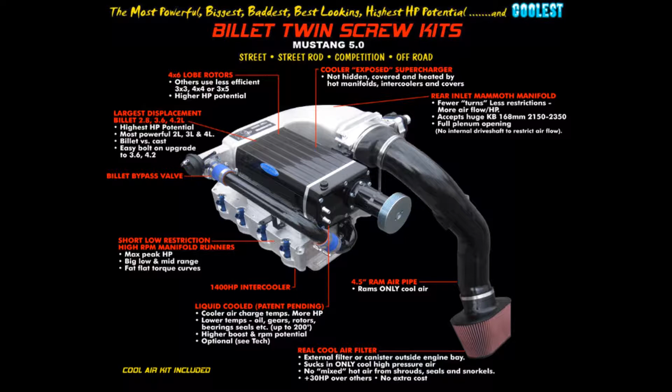Hello and welcome to my Kenne Bell twin screw supercharger installation video. In this video I'm going to be going over my installation of a 2.8 liter liquid cooled Kenne Bell supercharger on my 2012 5-liter Mustang.

Before I started the supercharger installation, I wanted to get some baseline numbers on the car. So I headed over to Smokey's Dyno in North Canton, Ohio, and we strapped the car down to their Superflow dyno. The only modifications done to my car for the baseline runs were a cold air intake, an off-road X-pipe, and a tune. The car put down 434 rear wheel horsepower and 429 foot-pounds of torque.

So when you order the kit from Kenne Bell, this is pretty much what you're going to get. A couple of big 80-pound boxes. Here's the first one opened up. You can see the heat exchanger and some heater hoses there. After you get that stuff out in a big chunk of foam, you can see the supercharger there. And then after I opened up the second box, there's the air filter, the air inlet. And then after I pulled that stuff out in another big chunk of foam, you can see the lower intake manifold upside down there.

And then this bag has pretty much everything else in the kit. The water pump, the throttle body adapter plate, the injectors, all the hardware. Everything else is in this really big bag. Here's a better view of everything that comes in the kit. I have it all laid out on the table here. And at the end there you can see that really big bag of stuff. Trust me, there's a lot of parts in there.

Here's a before shot under the hood of my car. And now I'm pretty much going to start off with step 1 of the instructions. The Kenne Bell instructions are really good. There's a picture for just about every step. The steps are pretty easy to follow. There's no way I could cover them all in a short video like this, but what I'm going to try and do is focus on the ones that I didn't understand too well, or the ones that gave me trouble, and then the other important ones that I think people would want to see.

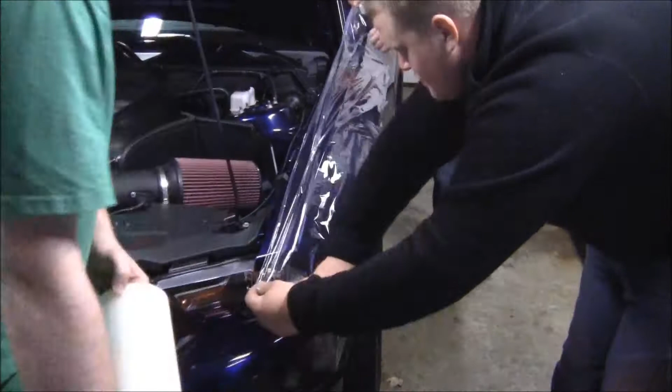Alright, this is step 1, which is pretty much wrapping the fenders of the car and wrapping the front bumper just to make sure that you don't scratch anything while you're doing the install. As is customary with almost any part you install on a car, go ahead and disconnect the negative battery terminal. If you've already installed an air intake before, then the first 20 or so steps are going to look pretty familiar. That's really all you're doing here is removing the engine cover, removing the factory air box, removing the mass airflow meter from the air intake.

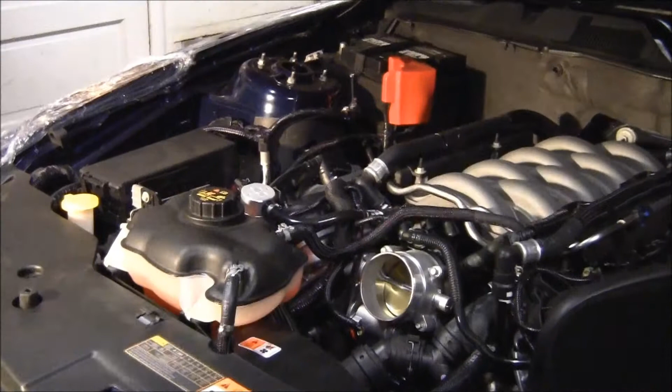Be careful where it talks about the clip for the evap line. That clip is really easy to break. I broke mine. You can't buy the clip by itself from Ford. You have to buy the whole line. It's like $50 some. I ended up using a zip tie later to attach that line. I'll show you how I did that.

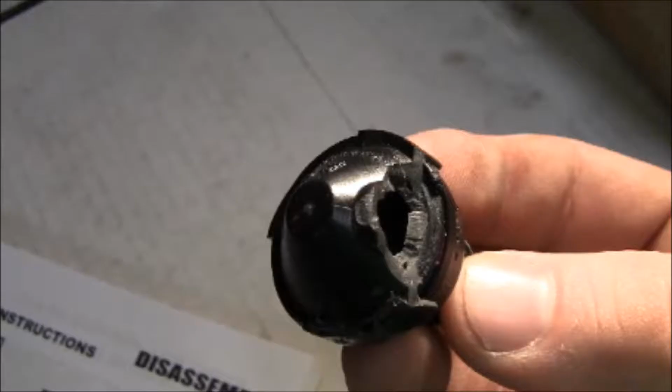Right, that brings us to the first real snag that I had in the installation. This is the result of what happened when I followed step 22 that says pull the power brake check valve out of the brake booster. I pulled and pulled on mine. I tried to be somewhat gentle with it, and I couldn't get it to come out. And then I pulled a little bit harder, and this is what I got. I broke that fitting off where the actual line goes onto it. And I think really what happened here is that my booster was still under vacuum when I was pulling on it. I think if you pump the brake pedal a few times, you'll probably bleed that vacuum out of the booster, and this will probably come out a lot easier.

This is where I was after step 38. You pretty much just take the fuel line off, unplug the throttle body, unbolt the intake manifold, and pull a few clips off the back and pretty much lift it right off.

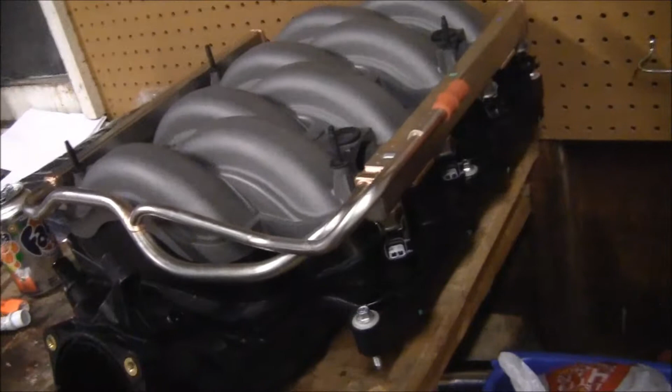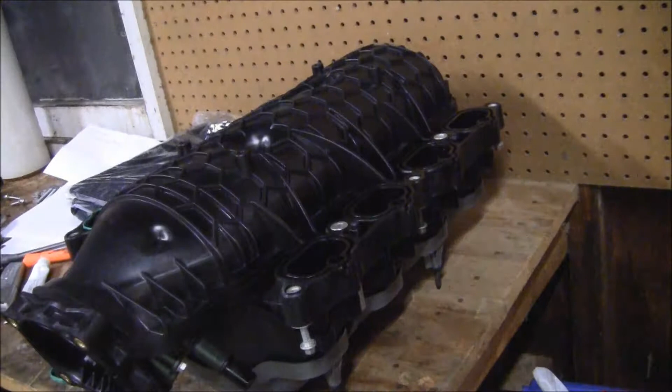The next series of steps have you disassemble the factory intake manifold. The first thing that you're going to do is pull the injectors out while they're still attached to the fuel rail. And then after you get the fuel rail and the injectors out of the way, you can flip the intake manifold over and pull all the gaskets out of the bottom of it. These aren't really too bad to get out. I had to use a small screwdriver to get underneath of them because they're kind of hard to get your hands on, but once you get under them and you can actually grab a hold of them, they all come out pretty easily. I kept all of these in the same order that they were in the manifold to try and put them back on the same spot on the head. I doubt that matters, but that's the way I did it.

Next, you're going to disassemble the fuel rail, and really you just have to pry all of these clips off the injectors. Once you kind of figure out how to get the screwdriver down in there, they come off pretty easily. You just kind of have to slide the screwdriver down past the clips that you can push on the side of the fuel rail, and they come off. One thing to be careful about, the last one of these that I took off, I shot it across the garage, so I guess just be careful when you're pulling these off there that you don't lose one.

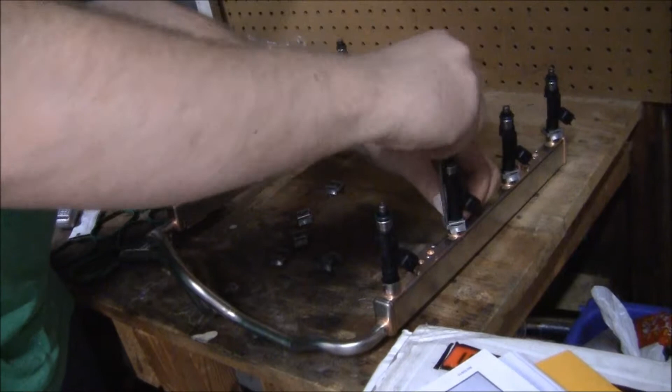Next, you need to lubricate the new injectors with oil. I just use clean motor oil for this. I wipe a little bit around each of the O-rings and they snap down into the fuel rail.

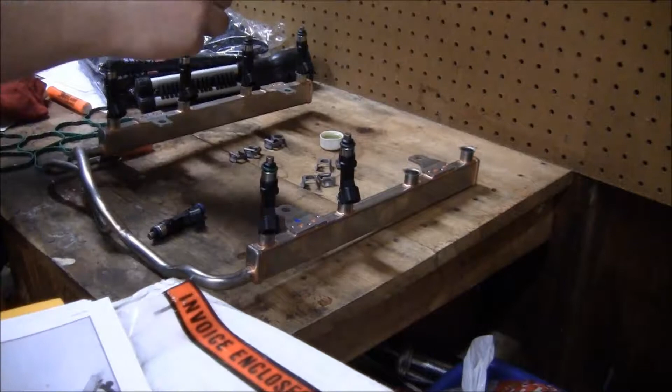Next, you have to put the clips back on the injectors, and this part got a little bit confusing for me. Step 50 says note position of rail stubs. I have no idea what a rail stub is, but I think what they mean is that if you look at the body of the injector, there's a groove cut in it, and there's like a spot where the groove isn't cut, and that gives the clip a place to sit. So if you put the clip on where it kind of wants to go, the plug for the injector will be kind of off at an angle from the side of the fuel rail.

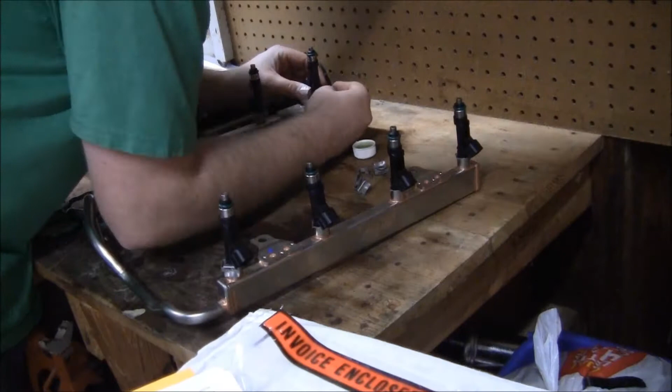And Kenne Bell doesn't want that. They want the plugs for the injectors to sit perpendicular straight out from the fuel rail. So once I kind of figured out what they wanted, you just kind of have to force the clip over that little piece of rubber that's on the side of the injector, and make sure that all the plugs sit perpendicular out from the fuel rail.

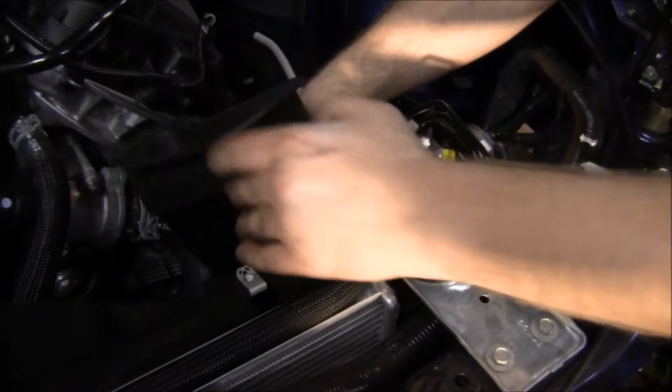After you get the front bumper off, step 63 says using a screwdriver, remove the air horn on the driver's side. What you're looking at here are tabs that hold the air horn pieces together. There's two halves to it. I had to separate the two halves to get it out of the car. I don't see how you could get it out in one piece. There's a couple more tabs down on the inside where the air actually flows through, and if you push on them, you can separate the two pieces. And there I am pulling the back part out of the engine bay, and then this is the front part where those other two tabs are, and I'm removing that from the front.

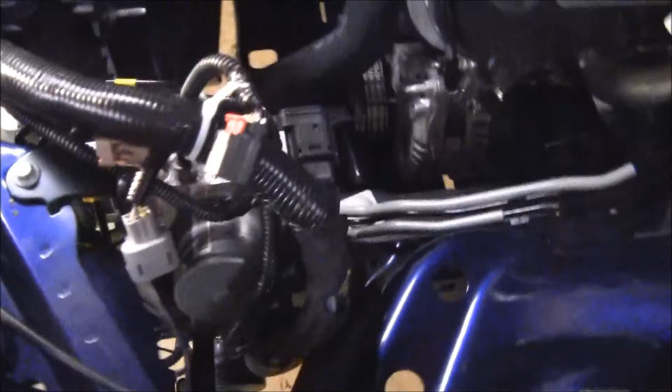After you get the inner fender and the headlight out, you're pretty much ready to cut the hole for the air intake. This is pretty much what it's going to look like when you get to that point. One thing that I would do that they don't tell you to do right now is to remove the horn. There's one bolt that holds it to the car, and it made it a lot easier for me to cut the hole for the air intake if I took that off.

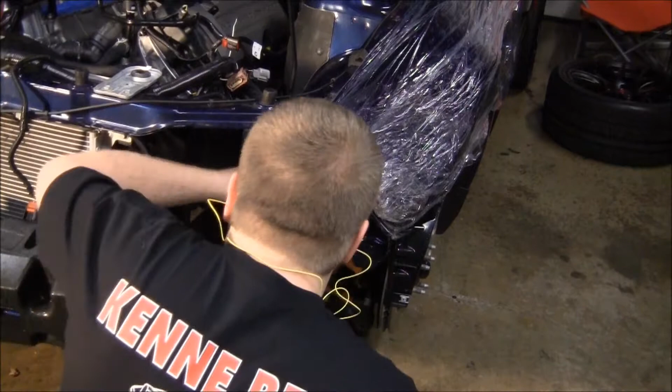Okay, this is the part where you have to cut the hole for the air intake. And to be honest, this part wasn't as bad as it sounded. You know, when I first read the instructions and I read online that I had to cut a big hole in my car, I wasn't really excited about it. I think it's a little bit better than grinding the timing cover like you have to do with some other superchargers, because at least when you do this, you're getting cold air into the intake, so you're at least getting a benefit from it. But it's really not that bad.

You cut the templates out, you trim them, you tape them onto the car, and then you just follow the line. I actually cut this one probably a little bit higher than it needed to be, and later on when I'm mounting the bracket for the headlight, you can see that. Right there is where I was taking the horns off. Like I said, that cheap jigsaw that I bought, it was easier to maneuver in there after I took those off. And I just bought a couple of spare blades for that thing, and it pretty much cut right through it with no problem.

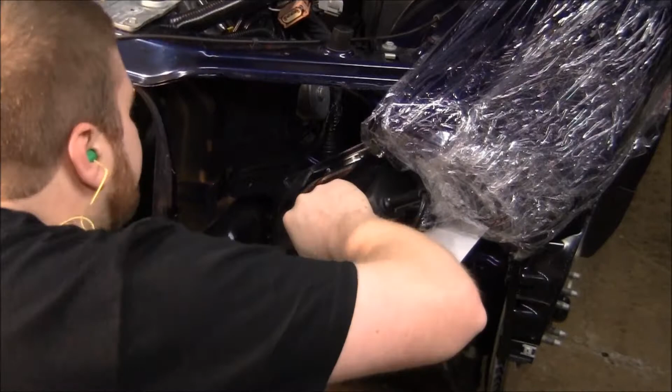Honestly, cutting the part on the inside was actually easier than this, which I thought the inside part was going to be harder. But you pretty much just cut around that half circle shape there, and it'll still kind of be connected in the back. But you pretty much just need to cut through that front piece with the template.

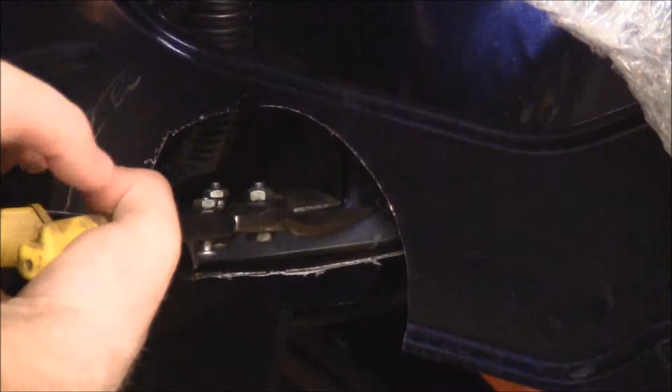This is pretty much what it looks like when you're done cutting in the front. Like I said, it's still attached in the back, but really all I did was just sort of push down on that front piece, and there was like that little part you can see back there with the hole in it. And I just used a pair of tin snips. I just kind of kept maneuvering that front piece and using the tin snips to cut through it.

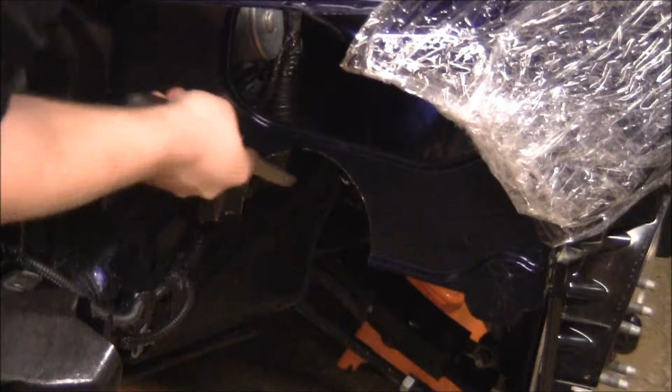And then after you get that big part cut off of the front, it's a lot easier to get in there with the tin snips and sort of trim off what's left. It looks a little brutal right now, but it actually turned out really clean and really neat. Here's what it looked like after I got that all trimmed out. And like the instructions said, I just took a file to the edge of it so that the rubber molding that they give you to go around there would slip on easily.

This is where I finally had my template taped on the inside, and I probably had this on and off the car about 10 times. And at first I kept trying to use the picture that they give you in the instructions to locate it, but then I realized that the way that I trimmed it out of the paper wasn't identical to the way that they trimmed it out of the paper, so it's really hard to use that picture to figure out where it goes.

But what I did finally figure out is that left to right, you can use the half circle shape that you already cut in the front. And then if you just take that part where the arrow is pointing that says front and push that all the way up to the vertical part that's still there, that's pretty much where it needs to be.

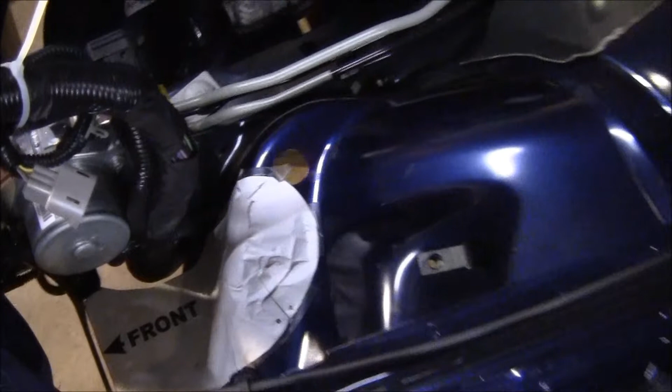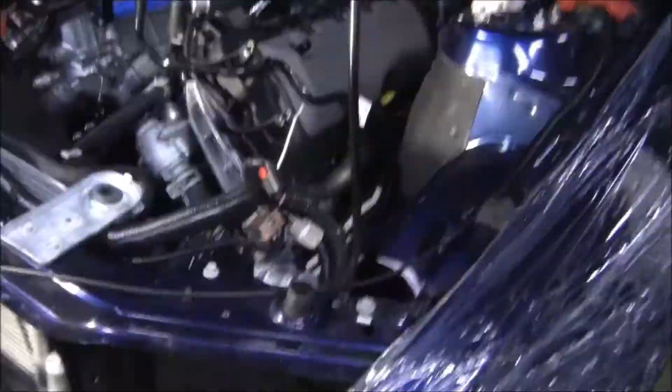Right here you can see the piece that I cut out, and like I said, I used that jigsaw on the inside. It cut through the metal easily. It's just maneuvering it down in there. That's why I think that if you have a smaller, pneumatic saw that you can fit down in there better, it'd be a lot easier. Here you can see the hole with a little bit of the template still left on it. I did have to go back in once and trim out a little bit more after test fitting the pipe.

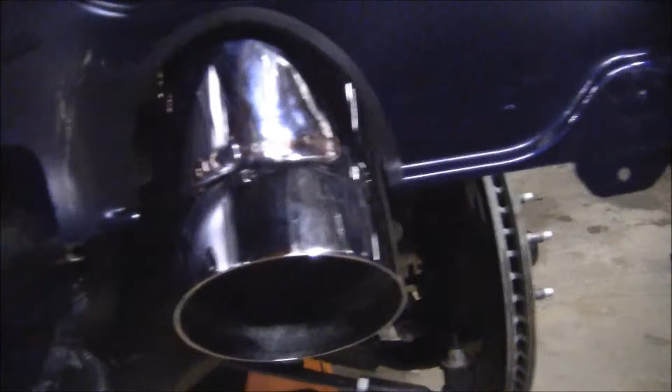Here it is with the pipe installed. I have the bolt going through the bracket that actually holds the air intake where it belongs, and there you can see where it comes down through the front. Since there's no throttle body on the car, there's nowhere to mount the top of the pipe, so it kind of makes the intake lean over. But there you can see I kind of pushed on the top of it to put it where it goes, and it pretty much comes straight through the hole that you cut.

You can kind of see there that the top of mine is up a little bit too high. It doesn't quite need to be up that high, but I really only wanted to cut it once. Then here you can see down through there, it's touching in a couple of places, but there when I push on it, you can see the light start to come through.

So it's really just touching the rubber molding that you put on there, and the molding stays on pretty good in most places, but there are a couple other ones where I had to put a little dab of silicone on it and then put a clamp on it so that it would stay. After I did that and the silicone dried, it was fine. It didn't move at all.

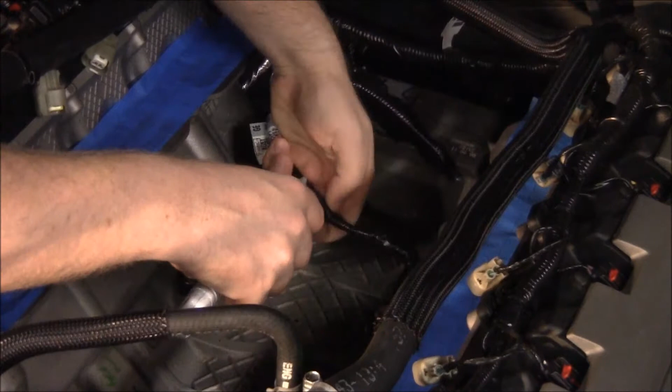Next, you have to reposition the knock sensors. The first few steps of this are just cutting all of this tape and wire loom off of the knock sensors. It's a little bit hard to get through with the knife, and I just kind of took my time and tried not to cut through any of the wires or my fingers.

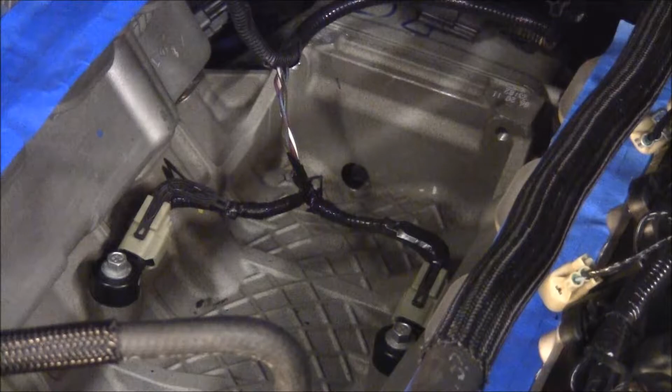And once you get all of the tape trimmed back off of the middle part there, and you get enough of it off of the part where the wires actually go to the sensors, you can expose these little plastic 90-degree clips that hold the wires off of the actual knock sensor plug, and you have to take those off so that you can sort of lay the wires where you want them. There you can see I took one off that side. Really, this is just a matter of taking your time and fighting through all this tape.

Okay, once you get all the tape and everything off and the clips off, you can go ahead and loosen up the knock sensors. It's just a 10mm bolt in each one, and loosen both of them up so that the clips will move freely.

To put the knock sensors where they go, you take a feeler gauge set at 70 thousandths, and you put it in between the clip for the knock sensor, the plug for it, and the side of the head. This would be easier to do with an extra set of hands, but you can get by. I just sort of held the feeler gauge against the head with the knock sensor, and then tightened the bolt down.

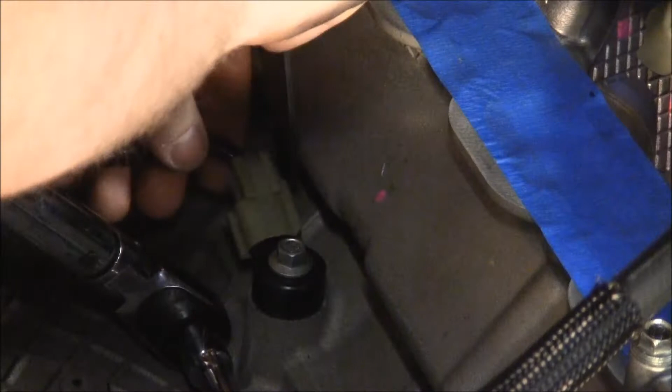And here's what you should have when you're done. That feeler gauge should just sort of drag when it goes in between the clip and the head. This is on the driver's side, and I pretty much repeated the same thing as the passenger side. I put the feeler gauge in between the clip and the head, and I tightened the bolt down.

The clip on this knock sensor kind of moves around a little bit. So here when I go to put the feeler gauge back in, it kind of won't go in. And then I sort of wiggle the clip and now it's loose. And then I push the clip over and now it's tight. So I kind of just tried to center the clip where it would sit naturally, and make sure that the feeler gauge was kind of snug in there.

So after you get the wires taped back together, you put the loom back on them. You're supposed to tape them down to the top of the block with this aluminum tape that they provide. Now when I installed this kit, it was about 30 degrees outside, and my engine block was probably about the same. I couldn't get the tape to stick. I cleaned the top of the motor like they said with carb cleaner, and I let it dry, and I really pushed on the tape and tried to work it down on there, but I couldn't get it to stick at all. It stuck to the wires just fine, but it absolutely would not stick to the motor.

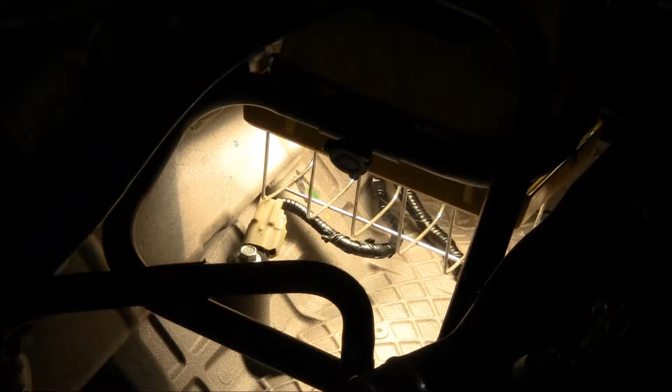The only way that I could see to get the tape to stick is to warm up the top of the engine. So I just set my shop light on top of it, and if you've ever used one of these, you know how hot they get. And this actually worked really well. I left it on there for about 15 minutes, and it heated everything up, heated the wires up, made them really soft, and allowed the tape to stick pretty good.

I used the picture in the instructions as a template on where to tape down the wires, where to make them lay and everything. Like I said, the heat from the light really softened the wires up so they were easy to put right where I wanted them, and it made the tape stick a lot better. After I pretty much got everything taped down and in place, I put the light back on top just to sort of warm up the tape and make sure that the glue on it was soft enough to stick to everything.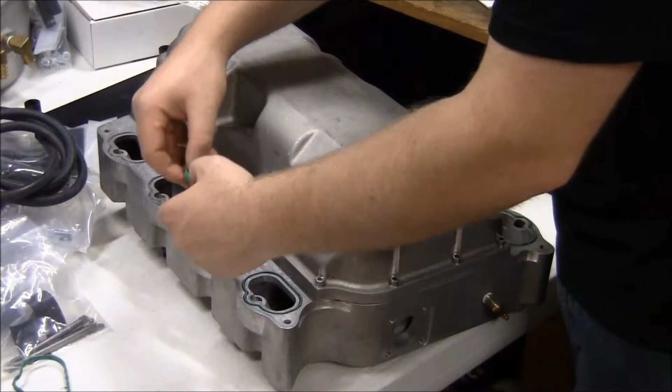Next, you prep the lower intake manifold to put it on the car. Really, that's just a matter of taking the factory gaskets from the stock intake manifold and putting them into the grooves cut in this one. They push right down in there with no trouble.

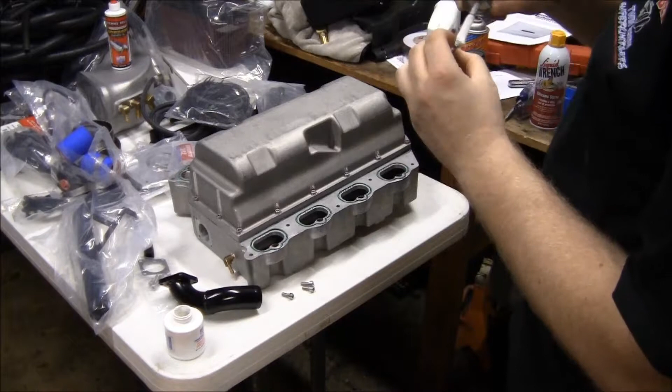And then you want to take the bypass tube that goes on the front and run a bead of silicone around where the gasket goes. What I put there may have been just a tad too much. I just let it squish out though. Then go ahead and put the gasket on there and take the 4 bolts that mount that to the front of the intake and cover them in Teflon paste so that it doesn't suck any air. And then after you get those 4 covered, you can just go ahead and bolt the bypass tube onto the front of the lower intake manifold.

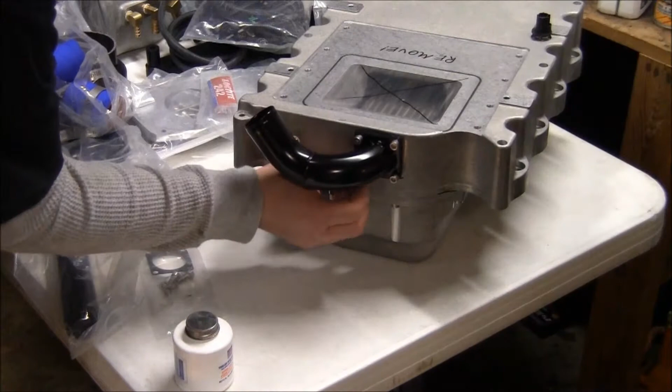Next was to lower the intake manifold actually down onto the engine. They're not kidding when they say to get help for this. It's not really a matter of the weight, it's fishing it down past all the stuff that's on top of the engine. There's the heater hoses on each side, and all of the clips for the injectors really get in the way. My other friend came over to help pull that stuff out of the way, and it was still kind of stuck on the heater hose there.

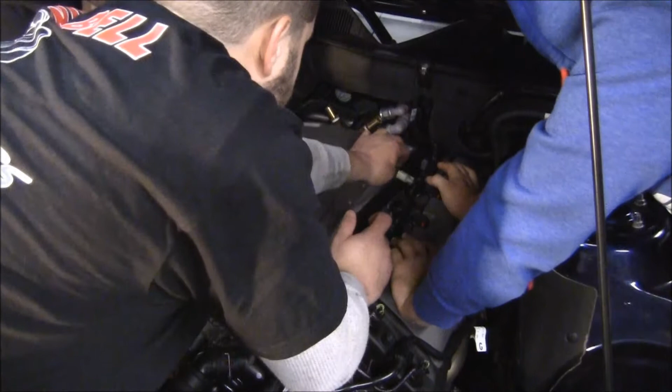Once you do get all that stuff out of the way, see how we picked it back up, it'll drop right down on there. It probably would have been better in the beginning to zip tie that stuff out of the way or move it, especially if you're trying to do this by yourself. Try and get all that stuff completely out of the way so you can get it to go down. Those two heater hoses in the back, the ones right by the firewall, were the last thing that actually had it hung up.

Even after I got the intake manifold down on the heads, it wasn't sitting flush. You can see here, when I actually push on it, that it's sort of rocking back and forth. I still don't know what it was sitting on, whether it was one of the gaskets that needed pushed down in or what, but there you can see me pushing on it, and it's definitely wiggling around.

My intention was to grab the bypass tube on the front of it, pick it up and set it down again. I thought maybe it wasn't lined up perfectly right. I grabbed the bypass tube at the front of the intake manifold and set it back down. Then I pushed down on the tube a little bit, and it sort of snapped down. Now you can see me pushing on it, and it's not moving at all. So just be sure you have that thing in place before you put the bolts in, because you want to make sure it's flush before you tighten the bolts down.

When you go to bolt the lower intake manifold down, there's 6 shorter bolts and 4 longer bolts. At this point, leave the 4 longer bolts out. Those are going to hold the fuel rail down, and since you don't have the fuel rail in yet, you can just go ahead and leave those out.

If you look at step 135, it tells you to leave out 2 of the bolts. But you had to put in 2 alignment pins before you put these bolts in to line up the intake manifold anyway, so they're assuming you don't put those in or the other 2. You'll notice on my intake manifold there's 4 raised bosses cast into it, that's where the tabs for the fuel rail sit. All the production manifolds are made that way, so you don't have to worry about putting washers underneath there.

This next part is where you have to pull the heater hose over top of the fuel rail. The first time I tried to pull it up over there, I just kind of popped the fuel rail and the injectors back out of the intake manifold. So I'd say if you're alone, probably put a bolt in that passenger side rear bolt hole to hold that down. In this case, I just had my friend hold it down while I pulled on the heater hose, got the front of it started, and then just kept rolling it, and you'll roll the rest of it right up over top of the fuel rail. It's really not that hard to do.

Now you can go ahead and drop in 3 of the 4 bolts that hold the fuel rail down. They tell you to put all 4 of them in, and then tell you to take the passenger side front one back out. So you can just go ahead and leave that one out. You'll put that one in when you do the bypass tube a little bit later on.

As far as the other 3, just use the bolts and a washer on top of the fuel rail. Those bosses are already cast into the intake on the production model, so you don't have to worry about using washers underneath it or anything like that. Just use the bolts, put a washer on top of the fuel rail tabs, and bolt them down.

This is the part where you need to mount the front plate, the big bracket that goes on the front of the engine where the idlers for the belt go on. There's 2 smooth idlers and 1 grooved one. This part is a little annoying because to put this plate on, you have to take the water pump pulley off. But to hold the pulley still to get the bolts off, you have to leave the belt on, loosen the bolts, take the belt off, take the pulley off, mount the plate, put the belt back on so you can tighten the water pump pulley bolts, and then take the belt back off again.

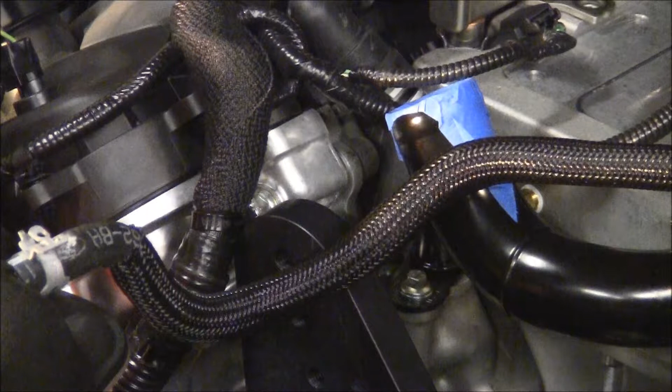Here you can see this clip that was hitting the plate when I put it on. I had trouble getting the bolts lined up at first and couldn't figure out why - it's because the end of the plate was hitting this clip, which slides over a stud on the front of the head. So you can see I pried that clip off, and that allowed the plate to go into place. They didn't say this in the instructions, but it's pretty straightforward - you can't put the plate on without moving that.

Here you can see me mounting one of the idlers onto the plate. These are pretty basic - there's the idler, a sleeve that goes in the middle of it, and a bolt. You've got 2 of the smooth ones, and then the grooved one down in the bottom corner. The top smooth one will change depending on the size of the pulley you're running - if you're running the stock pulley, it's all the way up in the top position, and if you go to a smaller one, you have to move it down.

After you plug a couple of extension harnesses in and zip tie them around the back of the motor and run them over to the other side where the throttle body is going to be, you get to the first part of the job where you have to solder something. There's 2 connections you have to make here: a violet and gray wire that you have to cut off of the existing plug, and then a blue wire that you have to tap into.

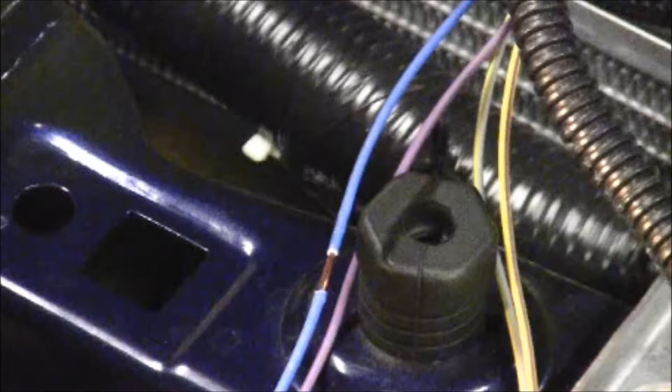The violet and gray one you can just cut off, and then solder the new one that goes to the IAT sensor for the lower intake manifold. This blue wire you can see here - all you want to do is strip back a little piece of it so you can tee into it, wrap the other wire around that, and make your solder connection. There's even a supplement in the instructions for this because I think they're concerned with people cutting through that blue wire, because you don't need to.

Here's a view of us doing exactly what you're not supposed to do, which is heat shrink tubing with a lighter. The reason I bring this up is because at the time I didn't have a heat gun, and I can promise you by the end of the job you're going to need one, so you might as well just go buy one at the beginning so you can shrink all your heat shrink tubing properly.

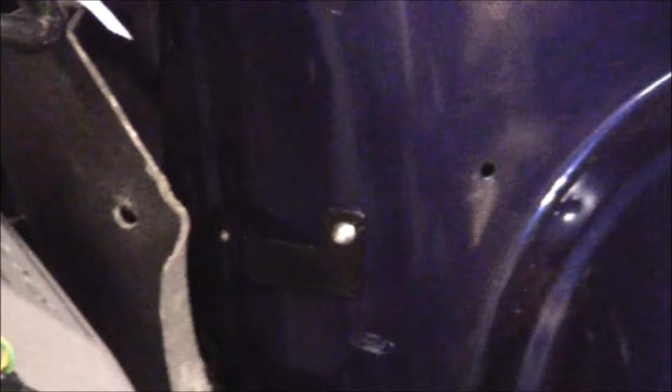That brings us to step 202, where you need to mount the speed nut to the shock tower so you can attach the evap solenoid. This is the first time I felt like the instructions were inadequate. The picture they show is more for a 2011 car, and I believe there's some kind of bracket there where you can just slip a speed nut over it. But on my 2012, there's nothing there - just the shock tower with a couple holes in it.

So here you can see how I mounted the bracket they give you to the shock tower. I put a nut on the back of that bolt on the inside of the shock tower out by the wheel, and mounted that on, which gave me a place to mount the aluminum block they give you that relocates the evap solenoid. I'm still not 100% sure if this is how this goes, but it looks good and it worked.

The best I can tell from the instructions, this is how it's supposed to go. I took the sound deadening material and trimmed it out a little further. That square hole that's already cut in it, I trimmed it out further, then pushed it back on and put the plastic clip back in. That really made it look clean, and gave me a spot to mount the evap solenoid.

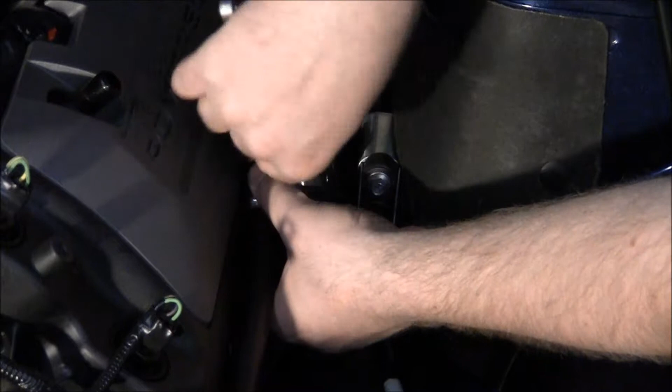After you cut a couple of your stock hoses apart to use the fittings from them, you can slide them into the hose and then attach it to the evap solenoid.

Like I said earlier, I broke that clip for the evap solenoid. So after I put the fitting onto the solenoid, I just slid a zip tie into where the clip would go, tightened it down, and it worked just like the clip, keeping the hose from coming off. Seeing as how I can't buy that clip separately, this is as good as it's going to get.

Then you pretty much just have to attach the evap hose to the other end by the firewall.

Before you mount the intercooler, you have to run a couple more lines. There's a PCV line and the fuel line. They're both pretty straightforward except for how the PCV line zip ties to this bracket.

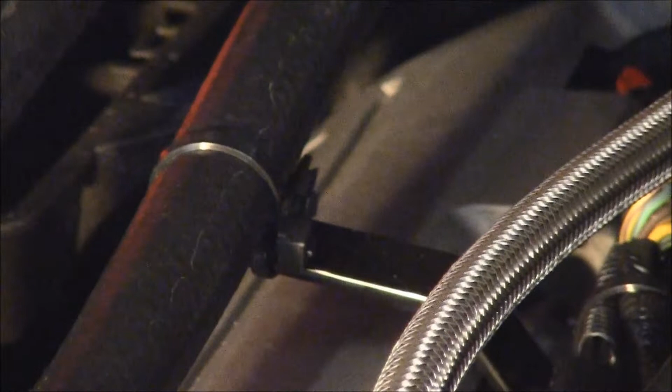The instructions just say to zip tie it to the bracket, but there's no hole in it and no tab on it - there's no way for that zip tie to catch. I couldn't get it to stay, so I put two zip ties on it. I tried to show it here in this picture: I wrapped one around the bracket and then another one that goes through that first one around the hose.

After you get your intercooler brackets assembled, this is pretty much what it's going to look like, and the instructions are really good here. You follow the pictures, put it together like they say, and it's going to fit fine. I did measure over and over and over, and got those dimensions between the holes and where the brackets are located exactly right. Because I did that, it went right on without any trouble at all.

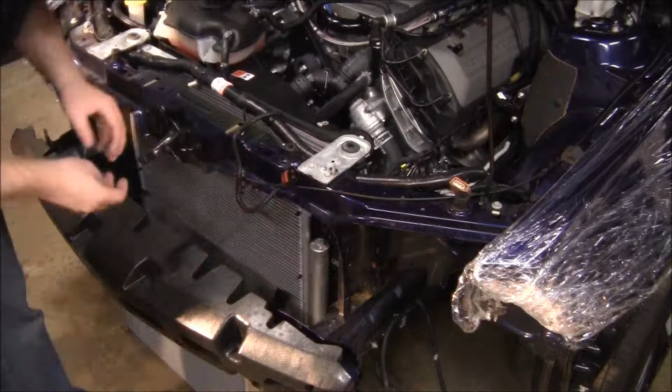This is me mounting the intercooler to the front of the car. The reason you're mounting it right now is so that you can mark the holes you're going to cut through the plastic flap on the passenger side of the radiator, so you can get the hoses run through there. Like I said before, I got those brackets in the exact spot that they said.

I pretty much set those bolts through the top of the core support and then pushed the intercooler assembly with the brackets up, and I hardly even pushed those bolts out of the top. I was able to push it pretty much right up on there, and then, by myself, get the nuts to go in the bottom and put the nuts on there and tighten it down.

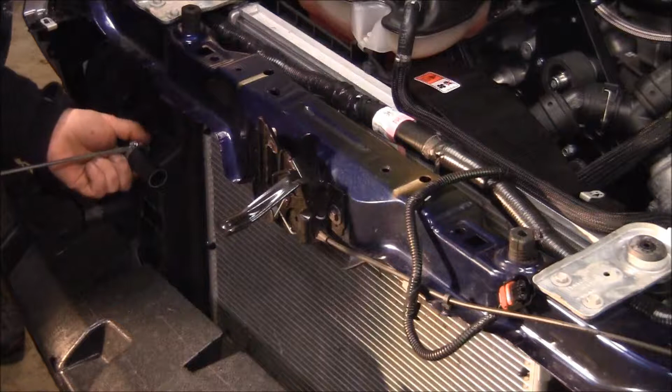Next you're going to trim the holes through that plastic flap for the intercooler lines to come through. This is pretty straightforward - you have the intercooler mounted, you take a paint marker and mark the holes. I used the hole saw and my jigsaw to cut them out, and a razor blade a little bit for the rubber part.

One thing to watch out for: on step 252 it says to remove the flap, and then on step 253 it says to mark the holes, but you want to mark the holes before you remove the flap, so just look ahead for that.

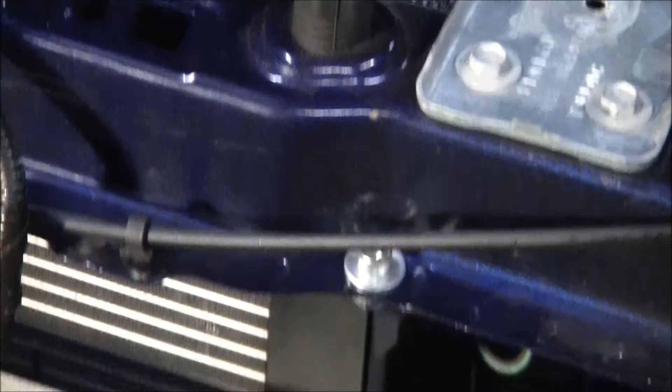Here you can see the bolt that's in the front. These are the two that you have to drill the holes for. That one, the washer is a little bit tight up against the vertical piece, but it kind of bent over when I tightened it down, so it turned out okay.

The last couple things that you have to do before you can get to modifying the headlight are mount the intercooler pump, mount the relay for the intercooler pump, and then wire it. What you're looking at there is where I mounted the relay for the intercooler pump, and it was at a pretty good spot. That hole was already in the car, and it was down out of the way. You can't see this at all once you put the cover back on.

And here's all the wires that are in the bottom of that fuse box. You have to tap into one of these, similar to the way that you tapped into the blue wire for the MAF. It's one of the wires in the front. You pretty much just strip back a little bit of the covering on the wire and then solder the power supply to the water pump so it turns on with the key.

And then after you get the water pump all mounted and the lines ran in and wired in and everything, you can mount the coolant reservoir. You can see that there. It just has a bracket on the front of it that pinches the top fin of the radiator. It's a little bit difficult to get a ratchet and a hex bit underneath that thing to tighten the bolts, but I managed to do it.

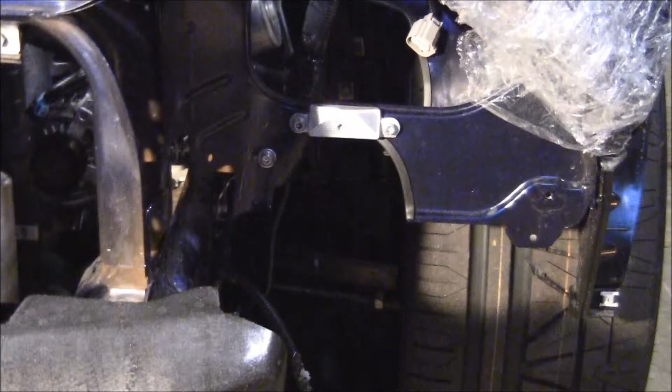The next thing that you have to do is mount the headlight back in the car, and this requires some modification to the headlight assembly. Before you put that aluminum bracket on that you're going to mount the third bolt to, there's another bolt that goes over on the left there, and that's just holding the car back together since you cut it apart when you cut that hole for the air intake.

And then that aluminum bracket needs to be lined up right with the bottom of the opening for the headlight, and that's going to give you somewhere to put the third headlight bolt because the third one went where the hole is now for the air intake.

Okay, here's my car with the headlight mounted back in, and with this slowed down video I'm going to try and show you exactly how that goes on the car. It's a little bit shaky because I was trying to do this by hand and it's hard to get the camera up underneath the car like this, but there's a black plastic tab on the bottom of the headlight assembly, and it has some ribs on the back of it. You need to put that on the car and then scribe a line across it where the bottom of that aluminum bracket is. And you can see there where I've already cut mine off, and you can see those ribs behind it.

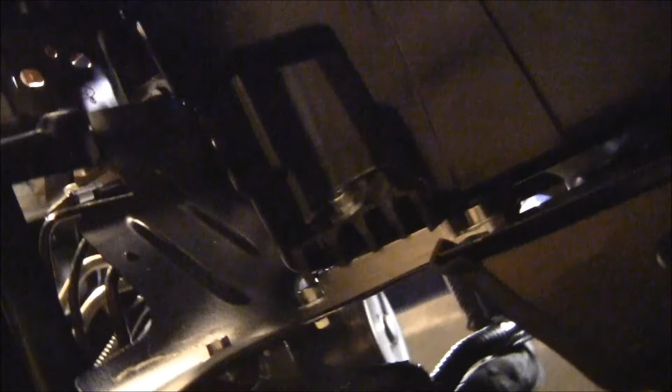And then you need to drill a hole right through the center of that, and you're actually going to drill a hole right through that center rib to put that third bolt in that's going to hold it to that aluminum bracket. It's a little bit hard to keep the drill bit straight, but it's at least plastic that you're dealing with. I didn't get mine perfectly straight through. It was at a little bit of an angle, and I had to open up the hole a little bit bigger than the bolt to get it to go through.

But that's pretty much what you need to do. You need to cut the bottom of that tab off, drill a hole through it, and then run the bolt through and make sure that that black plastic thing sits flush against the aluminum bracket, and that way your headlight will still be pointing in the same direction that it was before. One more thing is that on step 349 they tell you to cut the headlight adjuster off, and they don't tell you that until the headlight's back in the car. I did that before I put the headlight back in. It made it a lot easier.

And what you're looking at here are the spark plugs that I used. Step 354, Kenne Bell says to regap the stock spark plugs. I ended up going with the Ford Racing one heat range colder plugs. And you can see here I just covered the threads in anti-seize and then covered the porcelain on the other end in dielectric grease so that the boot wouldn't stick.

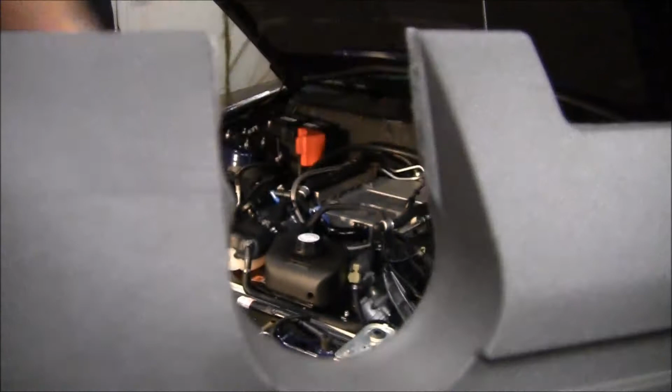The next step is to trim out the coil cover for the new PCV fitting. You can see here how mine's trimmed out. I used a pair of tin snips to do this, and I would definitely recommend not doing that. Mine didn't really cut out, it more like broke out, and I think I was just lucky that I didn't ruin the coil cover. I would use a Dremel or a hacksaw blade or something for this.

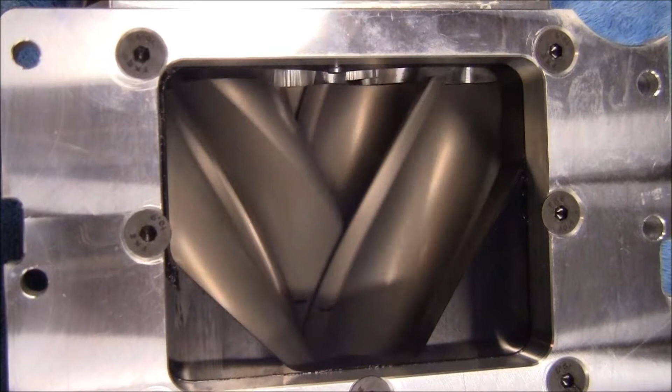If you get to the point where you're looking at this, you should be pretty excited because that means it's about time to mount the supercharger. And I really just took these couple pictures to show the screws because once it's on the car, you can't see them, and I thought they were pretty cool looking.

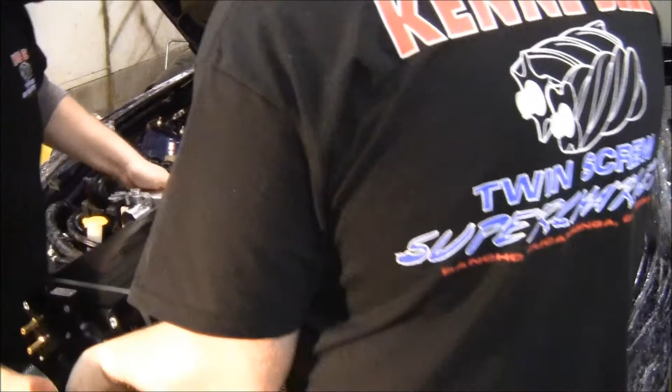Now it's time to mount the supercharger to the lower intake manifold. The first thing that I want to talk about here is the bypass valve. There you can see the bypass valve is mounted to the rear inlet, but when I took the supercharger out of the box, it wasn't. And I noticed this before I tried to put it on the car, so I skipped ahead to step 407, and they basically say that typically they mount that at the factory, but sometimes to prevent damage during shipping they don't. So I just went ahead and mounted that. That way it was easier. I didn't have to do it once the supercharger was on the car.

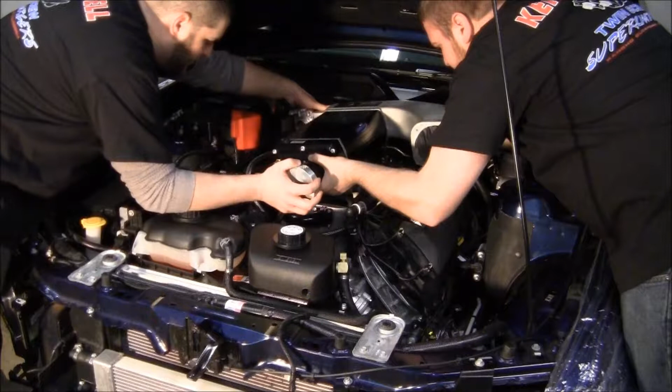The second thing is that after I got the supercharger down on the car, it felt solid. It felt like it was on there flat. It didn't rock. It didn't move around, but it didn't look like it was down in that recessed groove on the lower manifold. So I kind of fiddled around with it for a while because I thought that it wasn't in the right place, and I just kept picking it up and putting it back down and moving it around. And it just didn't look like it was down into that groove that's machined into the lower intake manifold.

But I put a few of the bolts in, and I just easily started tightening them down, and they really didn't give me a lot of resistance, and it pulled the supercharger right down into there. So I guess as long as you just make sure that it's flat and it's not rocking, you should be okay. This is what it's going to look like after you get the supercharger mounted down onto the lower intake manifold.

The last thing that I wanted to talk about here is the PCV hose that they tell you to mount in step 371. They tell you to trim a little bit of it off to prevent kinking, but even when I trimmed some off, I couldn't get it to go on there without bending it. So I rotated that fitting that's in the rear inlet of the supercharger. I rotated it back toward the firewall a little bit, and that made the hose come onto it at a much better angle, and then it didn't kink or anything.

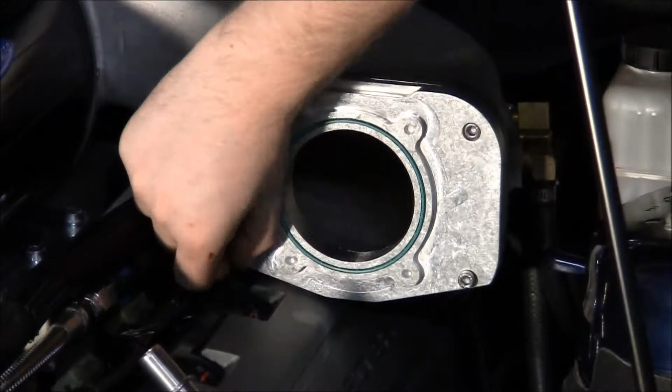After you get that coolant line rerouted to the top of the recovery bottle, you can mount the throttle body. And what you're seeing here is the adapter plate that allows you to mount the throttle body to the Mammoth air inlet, and it pretty much uses the gasket that was between the stock throttle body and the factory intake, and an O-ring on the back.

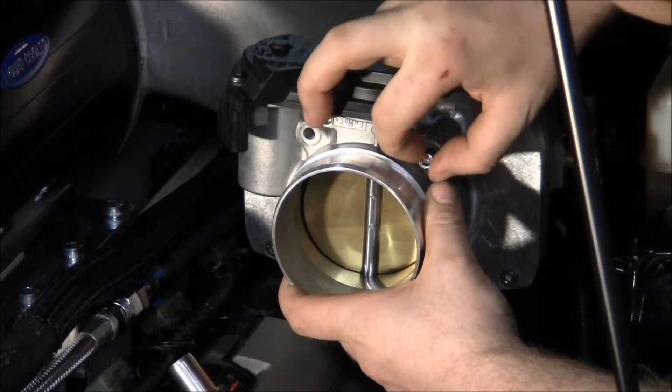So what you're going to watch now is me try and mount the stock throttle body to that adapter plate. If you're paying close attention, you probably already noticed that there's something that's wrong about that plate. But I mean, I did what anybody would do. I put the throttle body on there. I tried to get the bolts started so I could go ahead and tighten them down. And I fumbled with this for a little bit, trying to get the bolts started, and I couldn't get them started. I tried one in the other hole. I couldn't get it started there.

And then finally I took the throttle body back off just to try and put one of the bolts into the plate to see if it would start. And that's when I noticed that the plate was not tapped for those bolts. You can see there that there's no threads cut into that plate.

So it was unfortunate that this plate missed a few of the machining steps, but this happened in the evening, like 6 or 7 o'clock, and I was able to call Kenne Bell and tell them about it because they're out on the West Coast, and they shipped me out a plate that day. They overnighted it to me, and I had it by like noon the next day. So it was unfortunate that it happened, but they definitely fixed the mistake.

What you're looking at here is the pigtail that plugs into the throttle body, and the way I have it ran right now is underneath the inlet out by the injector harness by the heater hose there. That's the side of the inlet that you want to put it on before you set the supercharger down. I didn't do that. This comes around from that extension harness from the other side of the motor, and I had it behind the inlet, and I had to fish it underneath there, and it's not easy to do. And this picture pretty much just shows how I ran the vacuum line off of the bypass valve.

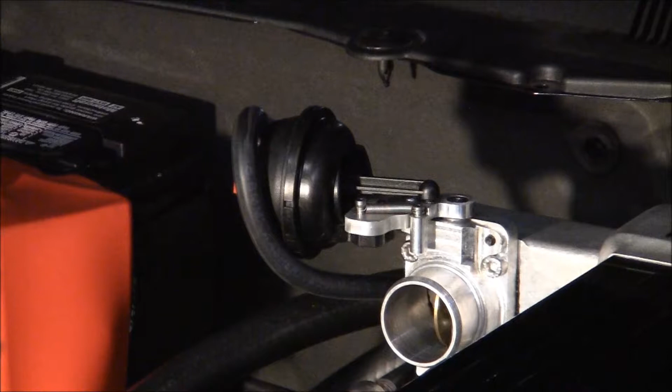I kind of wrapped it down around the front and then tucked it behind the fuel rail so that it would kind of contour the valve and stay neat. Since I couldn't put the throttle body on, I couldn't put the air intake on or any of the pieces that went with it, so I skipped ahead to step 405 and I installed the new belt.

Here's a better view of the bypass tube assembled. There's 2 couplers, 4 hose clamps, and you just assemble this in between the tube that comes off the lower manifold and the bypass valve, and then you can go ahead and put that last bolt in that goes through the top.

This is a close-up of the bypass valve, and basically there's those hose clamps right there, and they want you to make sure that they don't interfere with the operation of the bypass valve. So you can see that little gap right there in between the edge of the hose clamp and the arm of the bypass valve, and they just want you to move that back and forth to make sure that it doesn't hit that hose clamp.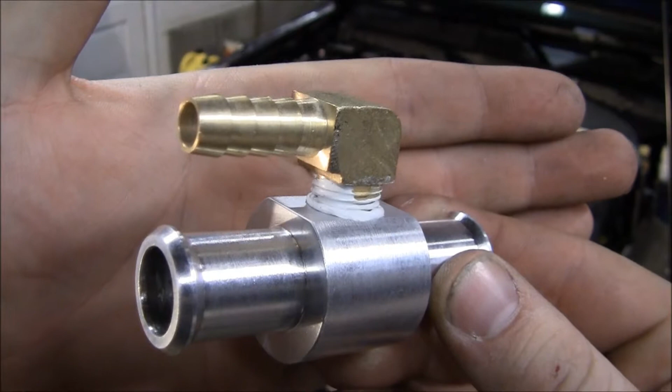The next series of steps are specific to the liquid-cooled version of the kit, which is the one that I got. This fitting came with a kit, and the instructions said that it should be assembled, but it wasn't, so I just put some Teflon paste on that fitting and then tightened it into the other fitting. These are some pictures that I tried to take to show where that fitting goes.

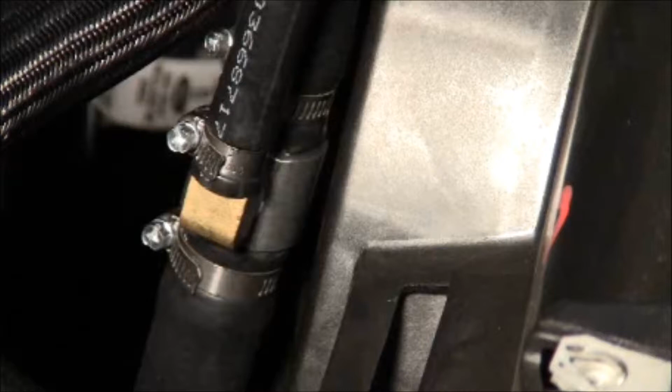You have to remove the factory coolant reservoir, and then there's the feed line that comes off of the water pump that goes to the bottom of the Kenne Bell reservoir. You have to cut a section out of it. You can see there where I cut a piece out and put that fitting in. And then the third line that comes off of the fitting goes to the front of the supercharger. Then you just fill up the reservoir and the heat exchanger and everything with a mixture of distilled water and coolant.

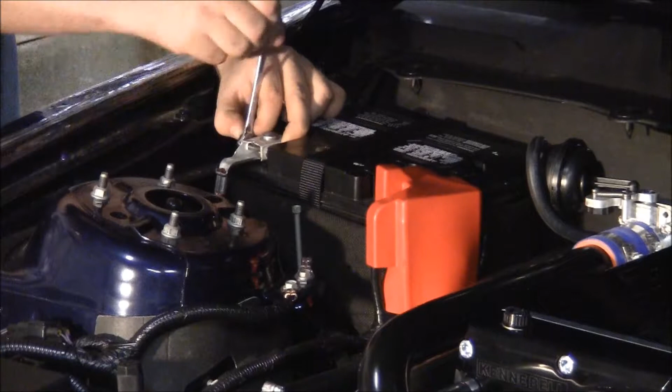And you have to be getting near the end when you can go ahead and reinstall the negative battery terminal. And then you can just go ahead and turn the key on, and that's going to let the pump run. You can actually hear the pump running in this video.

There you can see the reservoir is full of coolant, and that's pretty much all you're doing, is just letting the pump run for a while to get all the bubbles out of the system, and then you can look everywhere and check for leaks. I was really fortunate with mine. I mean, there really are a lot of water hose connections in this system, and none of mine leaked at all.

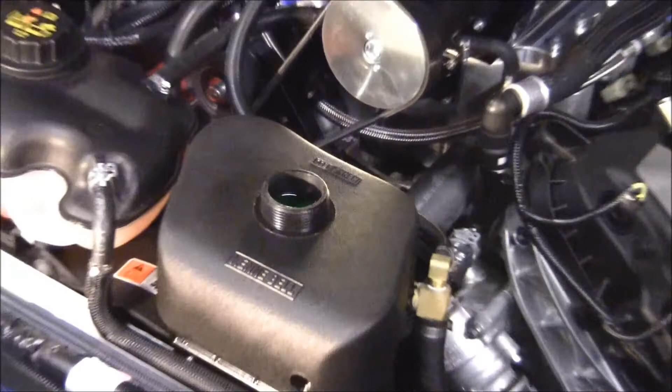The next day I got the new throttle body adapter plate from Kenne Bell. This is what it looks like. You can see that it's all machined, and it has threads cut for the throttle body bolts right there. Before you mount the throttle body, you need to put the O-ring and the gasket in it.

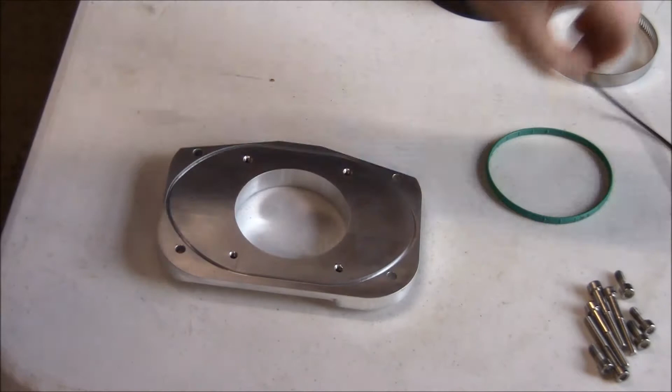Now this O-ring, it's a little deceiving here because this went in really easily because I had already put it in the other plate, the wrong one. It's actually kind of hard to get down in there to get it to fit right. You kind of have to work it around a lot, but it'll go in. It's the right length. Then you just go ahead and put the factory throttle body gasket in the front of it, and then you're ready to mount it to the air inlet.

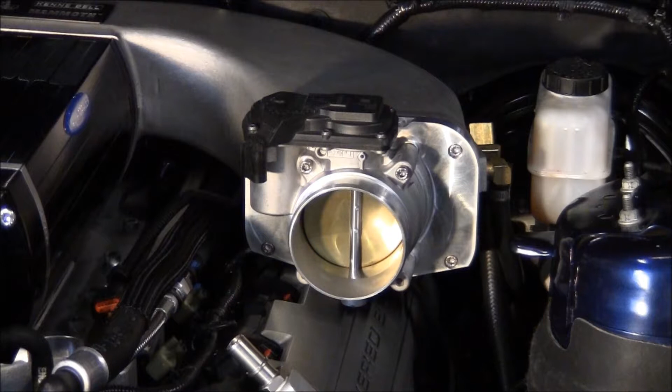Okay, then you're ready to mount the adapter plate to the Mammoth air inlet, and then after you do that, you can mount the throttle body. And if you notice here, I put a couple of the bolts in the throttle body before I remembered that the holes in the adapter plate where the throttle body bolts go in are through holes, and you need to put Teflon paste on those throttle body bolts.

So here you can see a bolt that I've put some Teflon paste on, and this is pretty simple, just to keep air from getting sucked in past the threads. So go ahead and cover the threads on 4 of those bolts, and then you're ready to actually tighten down the throttle body.

After you get the throttle body in place, you can go ahead and mount the air intake. Really, this is just putting a fitting in the air intake for the PCV line, bolting the MAF into it, and then wiggling it down into the car. It takes a little bit of wiggling to get it into place just right, to get it down through the hole that you cut, and to get it into that coupler on the throttle body.

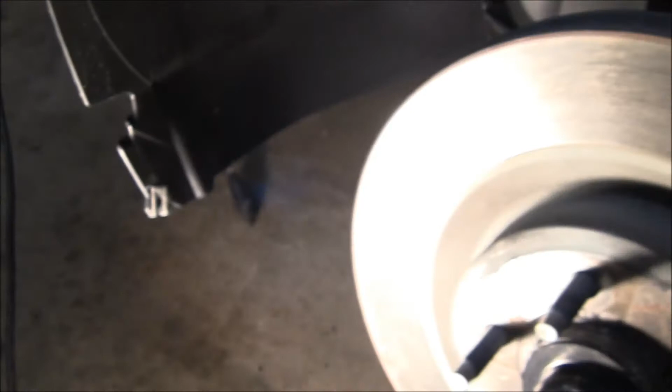That brings us to step 441, where they tell you to reinstall the inner fender. And here you can see a hole where the push pin is supposed to go through, but you can't even see the hole behind it. It's hitting the air intake tube on the other side. So there you can see that that push pin is installed, and it's where it's supposed to be.

And up there on the top, you can see that one of the push pins is in and the other hole is lined up. But when you look at the front here, it's not even close. That needs to be up against that flat part of the car right there so you can bolt it on. And there's a huge gap there. Here's the back of it where it's actually hitting the air intake tube.

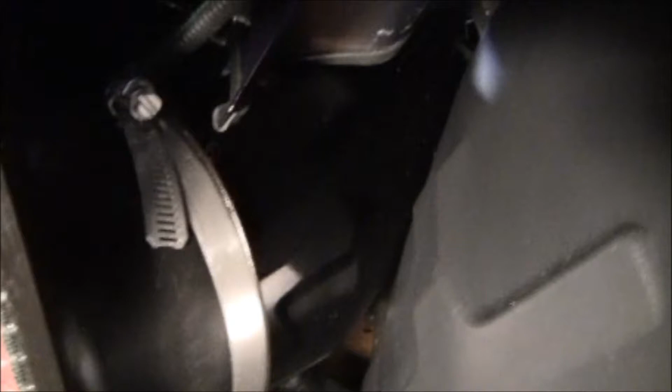The only way that I could see to get this to go back on was to use a heat gun. That's why I said earlier in the video that you're definitely going to need a heat gun. There you can see it kind of bulging around there. That's me pushing on it to kind of force it into place.

So after I put a heat gun to it for a little while and just pushed on it, really, this is what it looks like. It doesn't really look like it's bulged through that bad. You can just sort of see a crease there where that little dimple is. But if you look here, the gap is completely gone. It's all the way up against the front of the car. It fits pretty much exactly like it's supposed to be. So I'm even pulling on the inner fender there, and it goes right back up against it.

There you can see that push pin is installed, and that hole lined up, and it was flush up against there. That's the part where it's kind of bulged out from the air intake. And then there's one of the upper push pins, and then there's the other two. And then here's the back of it where you can see that the inner fender is sort of molded around the air intake a little bit more.

Alright, the next step has you put the front bumper back on. And I would just be careful when you're doing this. There's a really thin specific place on the edge where you have to fit the bumper into. And if you don't get it in the right spot, you can just sort of bend what's behind there and it won't sit flush. So just pay really close attention when you go to put the edge of the bumper on where it meets up to the fender, that you get it in the right spot.

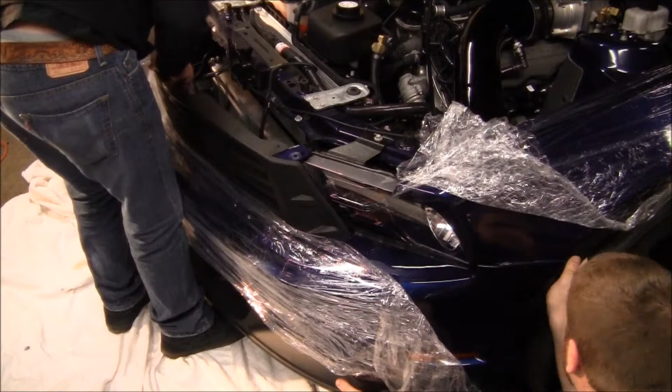Step 453 has you reinstall the splash pan. What I'm trying to show here is that when I put my splash pan back on, it pinched the hose that comes off of that water pump against the bottom of the radiator. Well, you can kind of see it there. It's not really pinched off, but it's definitely squished some, and I was afraid that when it got hot it would collapse even more. So I took the splash pan back off.

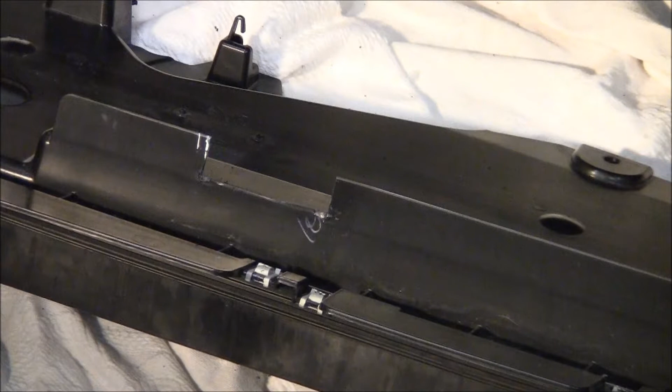I marked it with a paint marker where the hose was, I took it back off and I cut a notch in it, and that way it just allowed the hose to go through there without getting squished. You can see a little bit better here. I just used the jigsaw that I used earlier and notched it out.

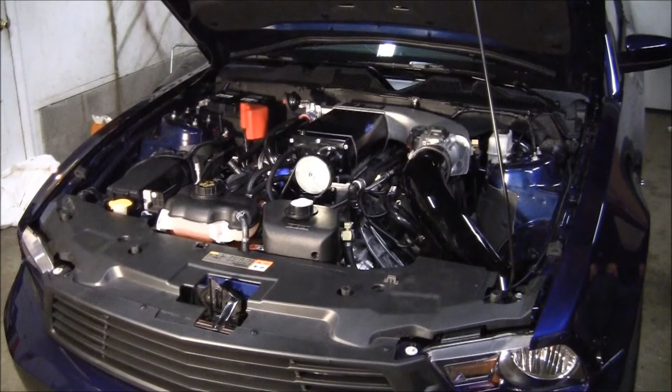Okay, after I got my splash pan back on, this is pretty much what my car looked like. Once you get to this point, you're ready to load the tune on, and then you're pretty much done. Just time to fire it up. I did notice after driving the car around a little bit that the pulley was cutting into the hood liner, so I'm going to have to probably trim that out a little bit so that it clears.